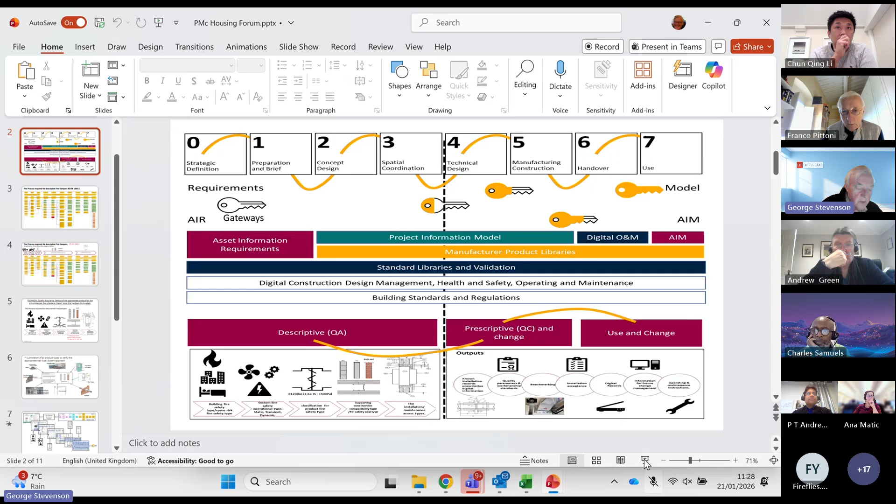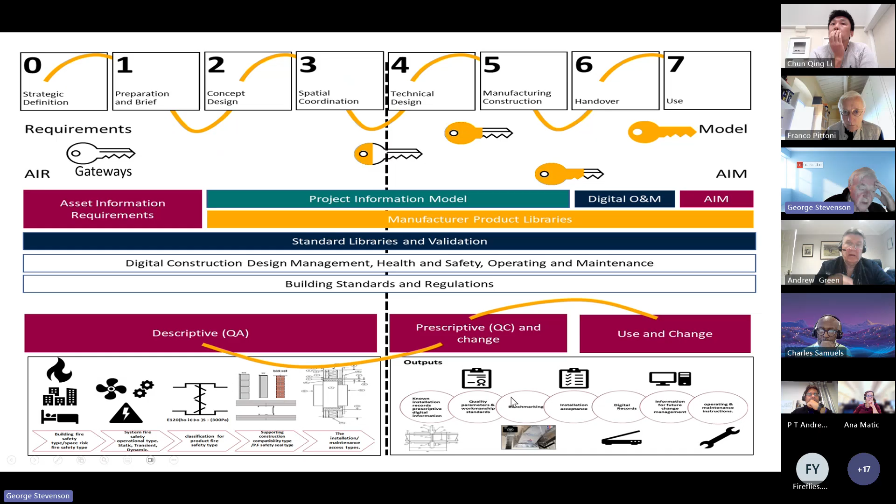And it needs to be an iterative process. So these are Paul's slides, going from a descriptive specification to a prescriptive specification - in other words, picking the actual product. And this is the process that is mapped out for a fire damper.

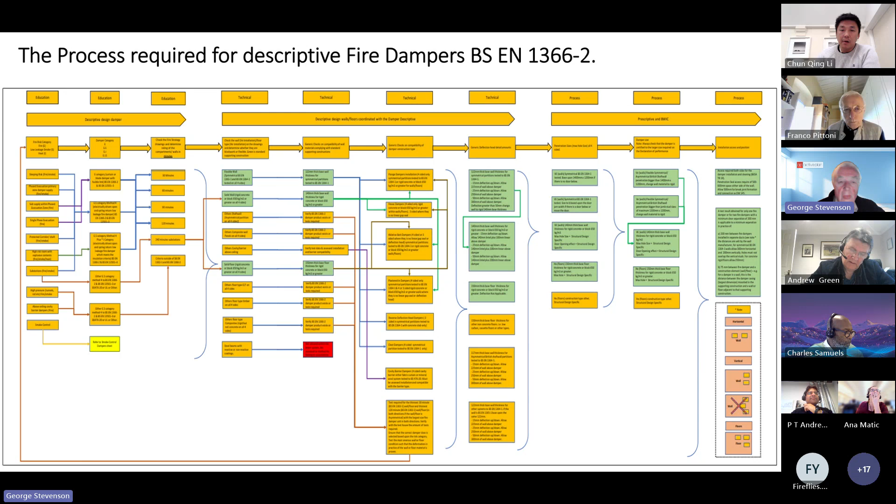So this is going through these different steps, saying you need to know not just whether you've got a product that does the job, it's also what job is it doing. And being able to make sure - which we're going to come on to in a minute, what Andy's talking about, which is classification - that you can relate the different steps through this process and make sure you've got the right...

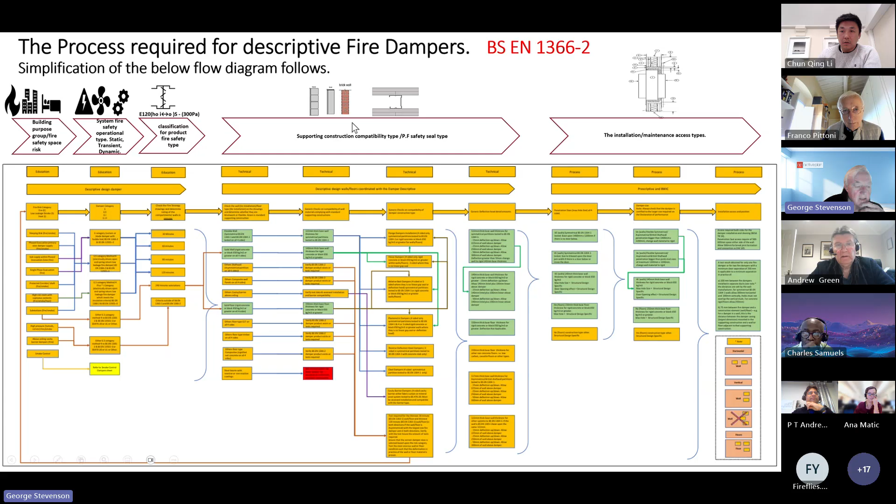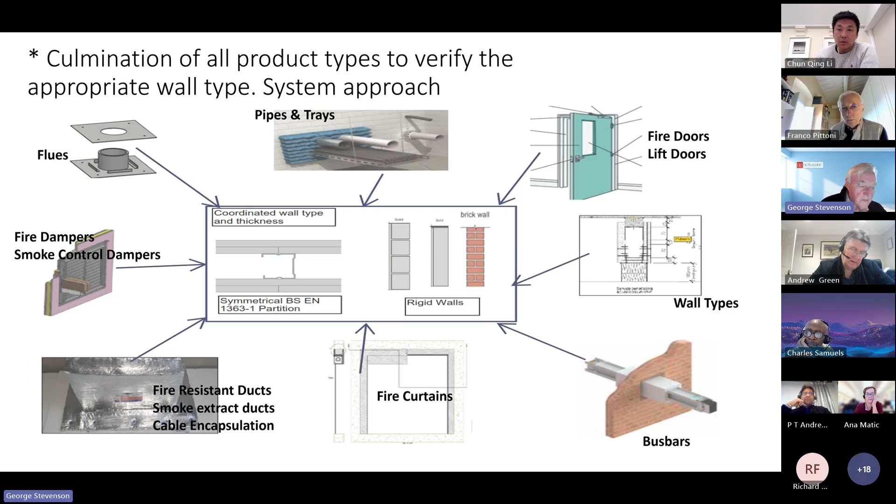product in the right substrate, and then being able to do this in a way that is auditable, and also making sure that supports are in place. So it's a matter not just of fire stopping, it's what is it that you're fire stopping. So the combination of the fire doors, for example, knowing where all the fire doors are and what wall it is. And he's then gone through and produced this process.

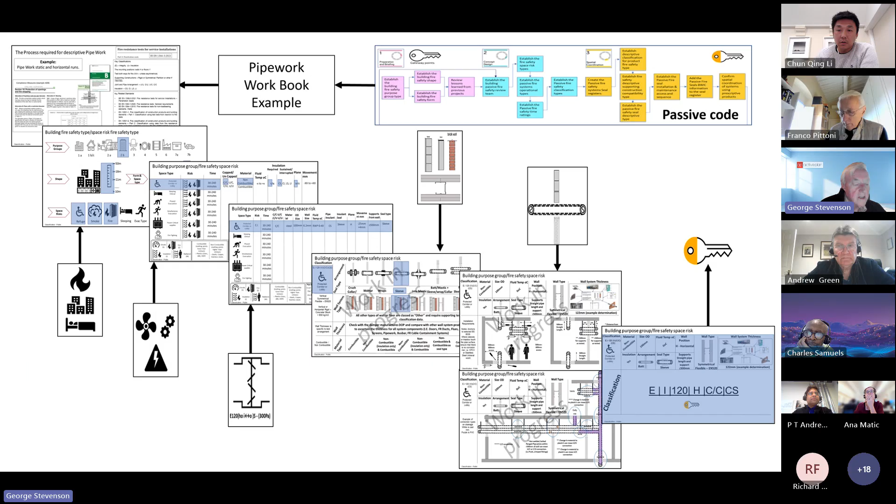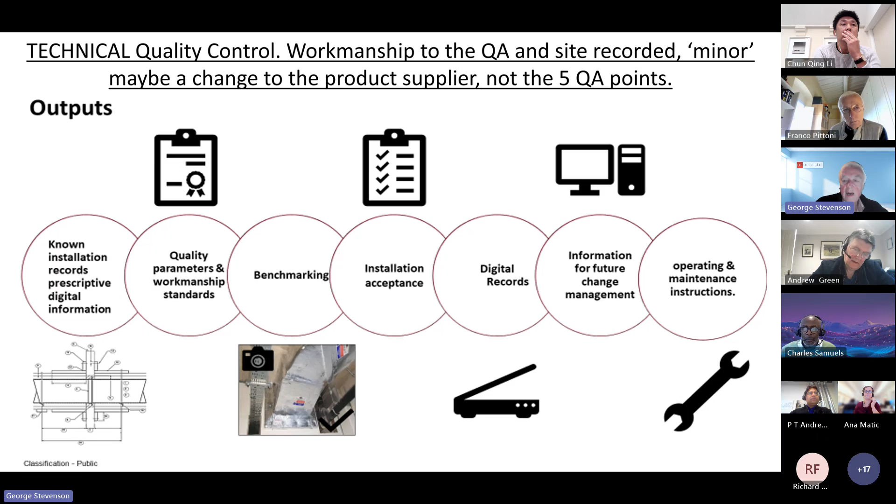Now, I've not yet discussed this with Paul recently, but this is something that's classic for AI to be able to help with. That doesn't mean that AI's got to make the decisions, but it's a way of...

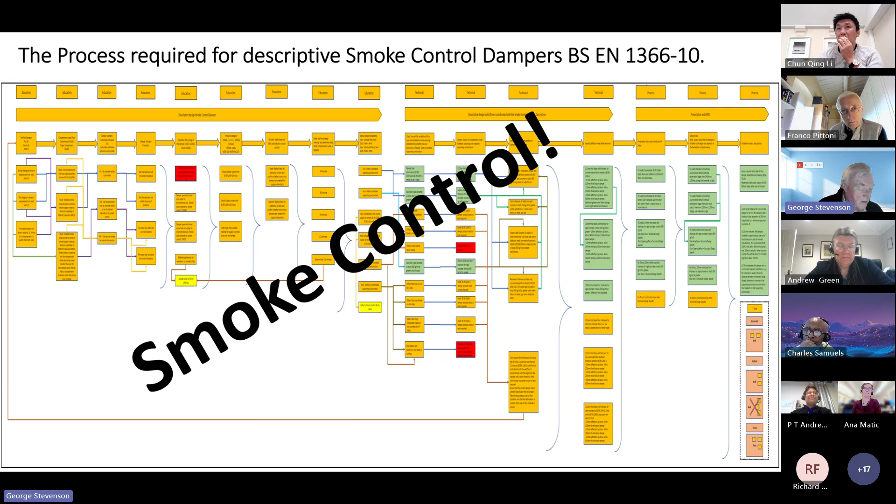Smoke control is even more complex, that's the point he was making there. But I don't know if that's something people are interested in, because compartmentation, I think, is going to be absolutely critical to this whole process.

We've got a court case at the moment which has just been kicked off by Lend-Lease. They're claiming from Balfour Beatty for a building. This is a compartmentation issue, I believe, that goes back 25 years. So a lot of the things we're doing, you've got a number of different drivers pushing that forward.

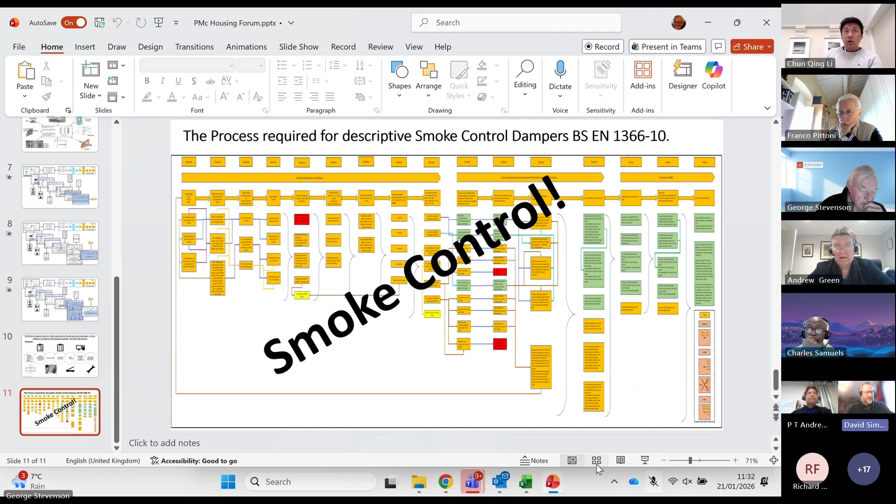I'll stand back, David. David Simpson? Hello, yes, David Simpson from Associated Architects. So we've recently completed 2 buildings just last year.

One was medium-rise apartment blocks, which just got through on the pre-flight or in-flight arrangements under the BSA, but was beginning to highlight an awful lot of issues and has changed some of the working practices we have for our current projects. Another was a 3-story SEND school, also completed last year, where the contractor in particular was trying to use it to highlight how they deal with builders' work penetrations and fire stopping.

So for the residential, the main thing that came out of it was fire stopping of the external walls. We had the same discussions about compatibility of substrate and what the fire stopping was tested for. This was further complicated by a relatively thin slab edge and some quite complicated masonry support angles hanging off that, all in the same zone that the fire stopping needed to be in. So it was also making sure all the fire stopping was certified for being penetrated up to a certain percentage by the masonry support angles, making sure the fire stopping had fire test data for SFS and brickwork.

We also had quite a lot of brickwork modelling, very deep recesses, window reveals, some unusual brick bonds, which meant the inner cavity face of the brickwork wasn't necessarily flat, and because of that, quite large cavities, which were often beyond the fire tested width of some of the fire stopping. So we had to introduce additional inner leaves of brickwork at floor zones to reduce those cavity widths down to what was certified, which in turn increased the brickwork support angle requirements because they were then carrying more masonry. So there was an awful lot of work there to make sure that all of that coordinated.

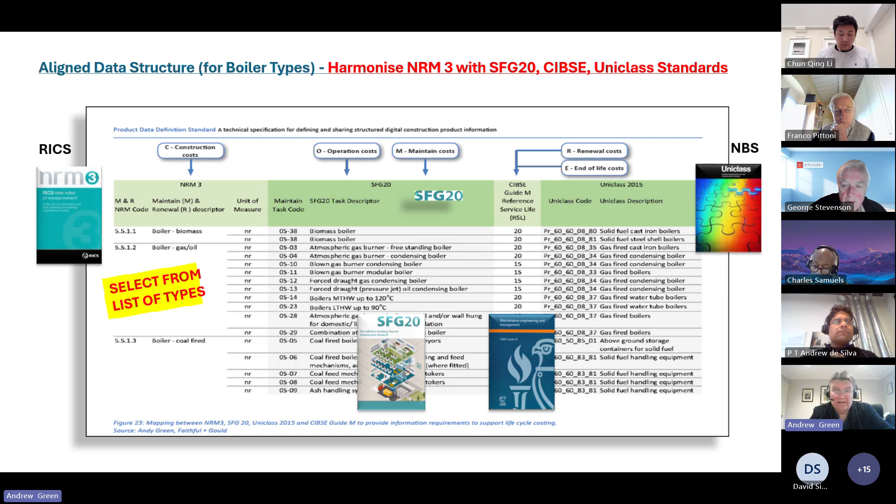So where the Alliance is moving to now, they've lined up all their standards, is to solve the 9 industry problems that we can all relate to. So what information do I need to run my housing or my school or my hospital over its whole life? And how do I get the design data linked to cost data linked to FM? It's shown how to do that, but I won't try and bore you with the detail of that right now. But we've proven that on some of the biggest projects in the world.

Can we cost and carbon off a BIM model? Yes, we've proven that with the RICS to move into what's called 5D costing, and carbon is also now possible, but it's not mainstream, so the RICS need to promote it widely to help people do it.

What most of this meeting's been about is handover and the Building Safety Act and the golden thread. We know how to enhance COBie, to improve its use and automate it straight into an operational model and do it in about 4.5 minutes, not keep doing it and then people mess it up and don't run it properly and all the data's lost.

And we proved that on 89 of the Government Property Agency buildings to show it can be done, to enhance the handover into ops and the data is used in the right format in the right way, using the relevant standards to turn on the maintenance, the renewal, fire up the CAFM system, an asset register that solves multiple purposes and tracks compliance. Fire stopping, 37 other items, and is maintained optimally, not just over maintained or under maintained, and the right budget is assigned to it.